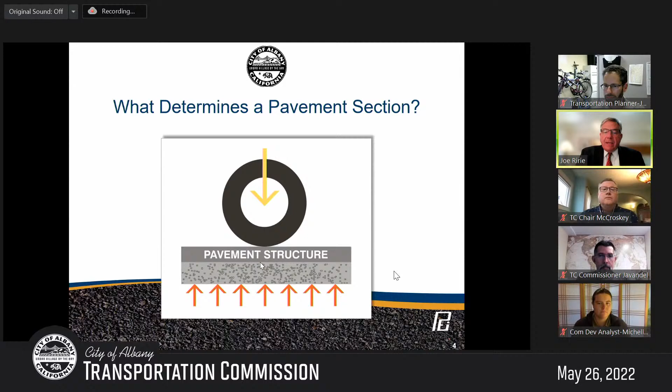A pavement structure is actually dependent on the loading from the top and what it is built on. The worse the soil is and the heavier the loads, the thicker the pavement structure needs to be. When pavement deteriorates, it deteriorates not linearly. It follows this S-shaped curve where the pavement looks good for a while and then drops off quickly and then levels out in a poorer condition.

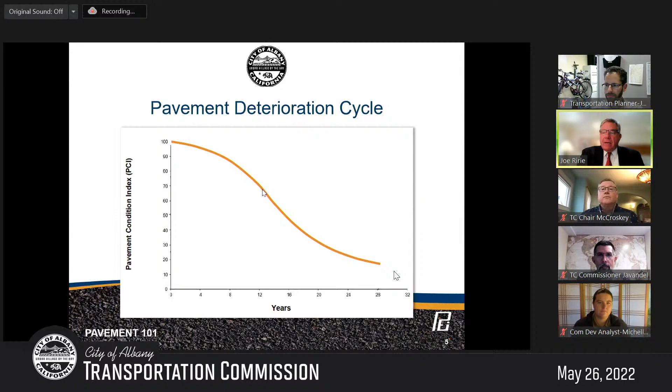We've seen that as we've driven on roads before, where we drive a road, and then one day we realize, wow, when did this road get so bad? That's because it's starting to fall down into the steeper part of the curve.

Asphalt pavement deteriorates in two different ways. The first way is through the environmental effects, the oxidizing effects of the sun and the water, and the second is from the fatigue loads from heavy vehicles.

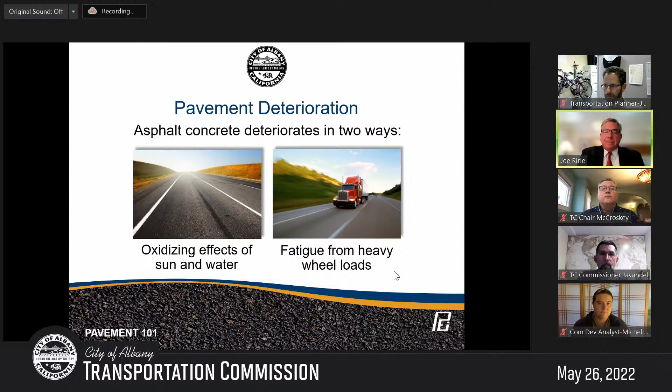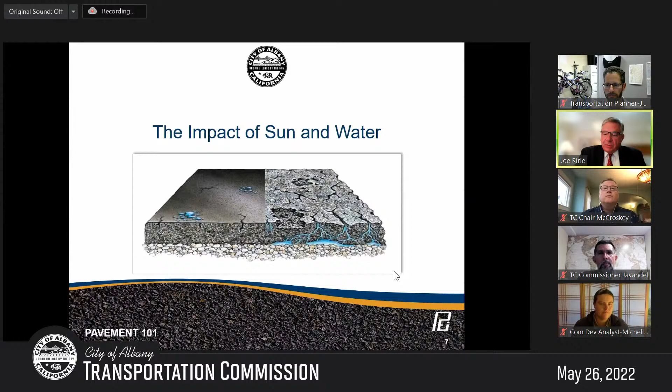In each of these different cases, the impact of the sun and the water actually breaks down the binder that is holding the aggregates together. The aggregates are glued together with the oil, and as the oil is exposed to the oxidizing effects of sun and water, it age hardens and becomes brittle. It actually will begin to burn out the volatiles and will lose mass. And as it loses mass, the pavement shrinks and cracks begin to form. And as those cracks form, then the pavement opens up and water can be introduced into the structure.

When we talk about the impact of heavy loads, it was always difficult for people to be able to wrap their head around it. And so we came up with this chart that allows us to think about pavements in a more user-friendly way, or the truckloads in a user-friendly way.

Many years ago, we got a Chevy S10 Blazer, and then we called that one vehicle unit, and then compared it to different types of trucks: 2, 3, 4, 5 axle trucks, buses and garbage trucks, and fully loaded 5 axle trucks, and equated it to our Chevy S10 Blazer.

One 2 axle truck, typical, is equal to 442 Chevy S10 Blazers. One 5 axle truck, fully loaded, delivering to Safeway or Lucky's, is going to be equal to almost 15,000 Chevy S10 Blazer units. So when it comes to pavement design and pavement structure, it's not the busyness of the road that really impacts the pavement design. It is the loading on the road.

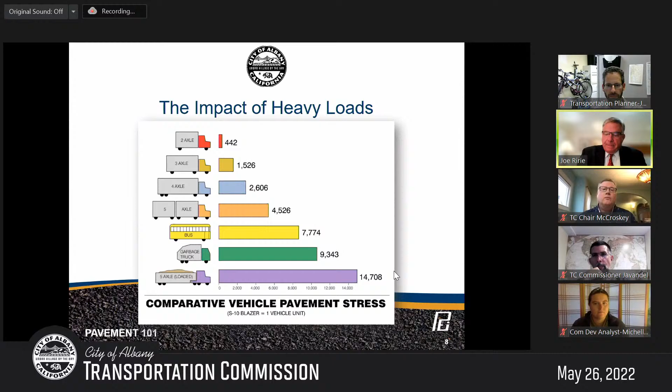As a prep for the information that we'll be sharing about the pavement management system, I wanted to remind you that the pavement management system was designed as a budgeting tool. It's an inventory tool. It's a place to be able to record pavement conditions, and it's a guide to be able to select potential street candidates for future repair and maintenance.

It was originally developed by the U.S. Army Corps of Engineers during World War II as a way to be able to rate the conditions of their runways. Since then, we've adopted it and use it as a way to be able to talk about our pavements.

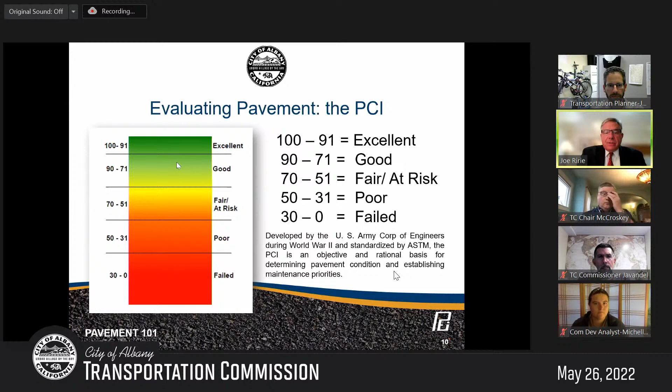It's a scale from 100 to 0, 100 being in excellent condition, no defects, 0 meaning that it has so many defects that you would consider it failed. There's a gradation that happens throughout there, similar to, you can almost think about it as a report card for your pavements.

It's dependent on the different types of distresses that are exhibited in a pavement structure. These are 4 very common types of distresses. On the left is weathering and raveling, where the fines begin to wash off or wear off from traffic.

The middle two slides are talking about that shrinkage from the environmental effects. It's opening up in this slide here where the pavement seam is - it's the weaker part of the pavement. In this slide over here, you're seeing what we refer to as block shrinkage cracking. The slide all the way to the right is alligator cracking, which is a fatigue type of crack.

I want to point out to you that the first three pictures are all distresses caused from environmental effects. The alligator cracking is from the loading, or the heavy loading, which means that you can build a brand new pavement and it's still going to deteriorate even though it never ever sees a vehicle.

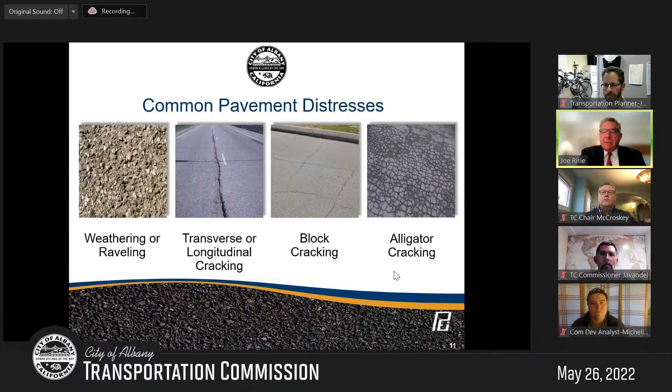So as part of the pavement condition update, we went out and assessed the pavements of Albany, and we looked at a number of different types of distresses. We measured them, quantified them, and then put them together into PCI.

So when you go out and look at pavements, at least for me, the pavement starts talking to me and telling me a story about itself, what's happening and what's going on. That helps with the design process.

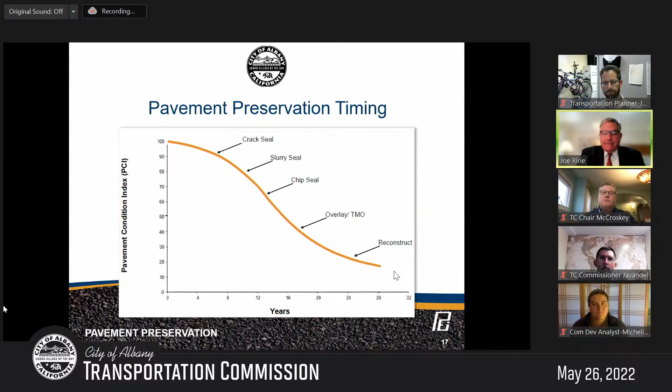As long as I've been doing this, I've only come up with three different types of pavement management strategies. Let me talk about each one of these.

The first one is a focus, or what we refer to as a best-first or top-down type of management, thinking: if I've got limited dollars, where do I want to spend my money? The first strategy is just focusing all your money on the very best pavements and ignoring the rest of them.

Another type of strategy is taking all the money you have available and focusing it on the worst pavements, selecting your pavements based on the worst PCI.

Both of those strategies, while they can be effective in a short-term situation, will not yield long-term sustainable pavement management. In fact, if you always focus on your very best pavements, then based on how deterioration occurs, you end up with a lot of pavements in good condition and a whole bunch of pavements in poor condition, without any in the middle.

If you're dealing with a worst-first type of situation, then you're just anticipating that every pavement is going to be in a failed condition, and that's the most expensive time to address those pavements.

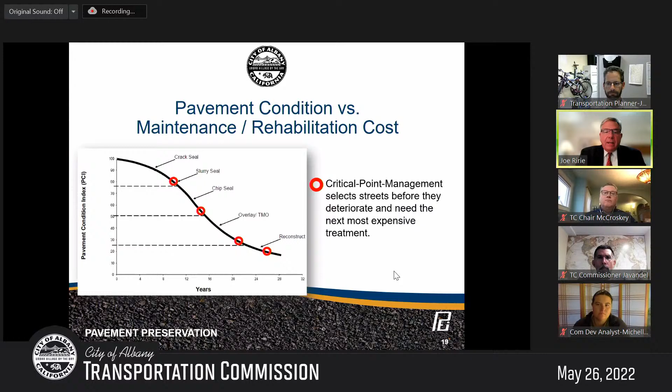You try and catch those pavements before they fall down into the next category, needing the next treatment. And so you'll see that we're doing that at several points along the deterioration curve. So a good pavement management system actually is pulling from all different parts of the curve at the optimal time for the deterioration of the pavement. And by doing that, you get the longest sustained impact to your pavement.

Okay, so let's talk about our assessment findings. For the city of Albany, just to remind you, you have just a little bit over 30 centerline miles. A centerline mile is if you take the very center of the street and you measure that distance. It's regardless of whether it has 2 lanes, 4 lanes, 6 lanes. The number of lanes is not counted here. It's just the centerline miles. So 30 centerline miles, and you have a total of a little over 5 million square feet of pavement.

Your system-wide average weighted PCI right now is a 60. Now that 60 also includes some upcoming treatments that have been scheduled for the 2022 year, and my understanding are right around the corner from construction. But what I want to emphasize is that your 30 centerline miles, or over 5 million square feet of pavement, has a replacement value of over $134 million. That means that you have a $134 million asset that you're trying to take care of.

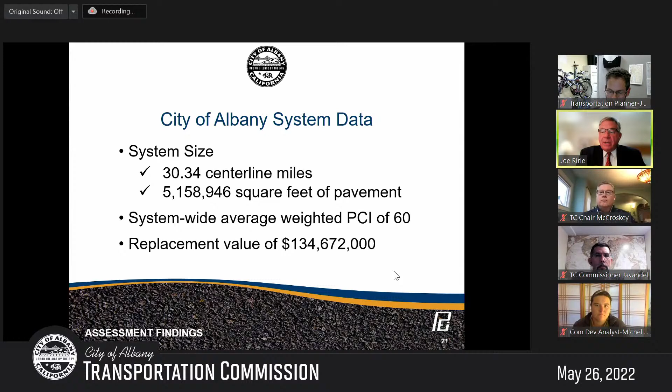That asset is just the pavement only. It does not include curb and gutter. It does not include curb ramps. It does not include sidewalks. It's just the pavement section only. Okay.

We divided up the system, looking at it from a functional class point of view. A functional class for a roadway is how it is being used. And so your arterials are the most used streets, often the busiest. Your collectors are the next busiest. And then you have residential streets, which are the neighborhood streets that the houses are usually on. And then you have some alleys as well that we classify as others.

So our system right now, and this is your 2022, includes the streets that are just done. So you're going to have a 60 PCI. Your arterials are a 55, your collectors are a 60, your residentials are a 62, and your alleys are actually a 62. And I thought it would be interesting to compare this over the last couple of years so you can see a trend.

Your arterials, you're not focusing as much on your arterials, they're dropping. Your collectors are staying pretty much the same. Your residentials is where I can tell from this data that you're focusing your dollars. And as a city, you were dropping in 2021, but with the scheduled work that's upcoming, you're looking at maintaining your system here.

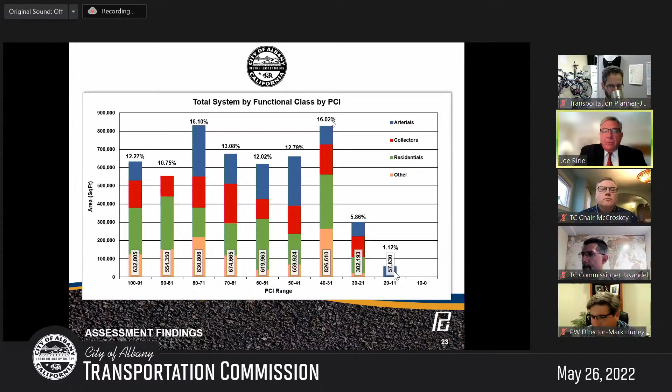Let's talk about funding needs. Your system, in order to maintain your 60 PCI, needs an investment of $2.6 million per year annually in order to hold it there. Your current budget is only $1.9 million per year. So that's why you're seeing after 5 years the trend line starting to separate, because you're not spending enough money.

If you wanted to increase your PCI by 5 points, you would need to spend $3.9 million per year annually. And if you spend nothing, then you can expect your PCI to drop to a 47 in 5 years. What your system wants to do from an optimal point of view is it wants to operate at an 83, but it would take a $35 million expenditure in that first year to get you to that condition.

But then in order to maintain it over years 2 through 5, it only takes $700,000 to $800,000 per year. So if you could get that high, then your maintenance costs actually go down.

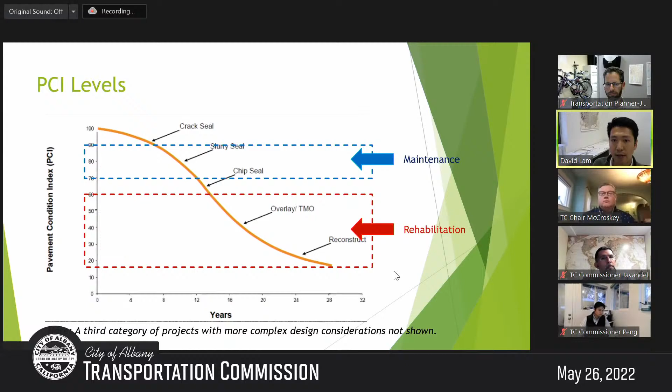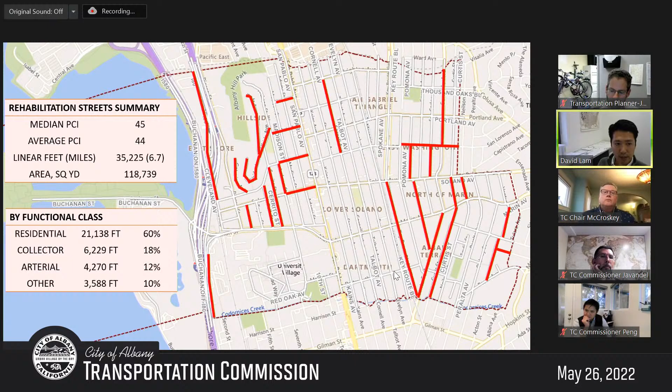Next up is the streets that are candidates for rehabilitation. So of course, these streets are going to be lower in PCI. So we're looking at a median PCI of 45 for this collection and an average PCI of 44. And that's a total of 6.7 centerline miles. And this is a coverage of 118,739 square yards. And then looking at the breakdown by functional class, about 3/5 are pulling from residential streets. And then collectors, arterials, and other streets make up the other 40%.

I also talked about avoiding conflicts with potential utility work. Some identified locations where we have potential sewer projects coming up include a cluster up near Brighton Street, a cluster between Solano and Washington, and then bounded east and west by San Pablo and Masonic.

And then some potential sewer work down by Dartmouth. I also wanted to point out that there's an absence of streets down in the south side of the city, south of Marin, where East Bay Mud recently completed their Cornell cluster water line replacement. So we're waiting to see, after East Bay Mud comes through with their pavement restoration, what the pavement condition looks like, and we may add those streets to the list to complete those streets.

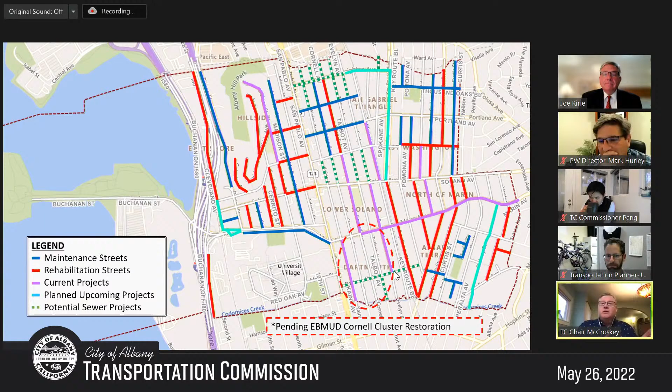We as a city, and I assume most cities, tend to consider their waste management contracts separately from their pavement management plans. At what point do you get to a point where it makes more sense to spend more money to use smaller garbage trucks versus putting more money into pavement? And are we anywhere near close to that?

Was that to me, Chair McCroskey? Anybody who's willing to take it.

I'm not seeing garbage trucks get smaller unless they're in communities with tight, small streets. Otherwise, they are just loading up the garbage trucks with as much as they can. And I will point out that garbage trucks are not monitored like our bigger trucks on the freeways. So I would imagine by the end of the day, they are all overweight, or at least at or overweight, which is consuming more pavement life. So it's a serious problem, but I'm not seeing any designs of trucks trying to minimize the loading impacts.

You might have hit on something right now. If you wanted to work on the design of a truck and try to figure out how to spread the load, you could probably make a whole bunch of money right now. Not my expertise. My expertise is asking annoying questions.

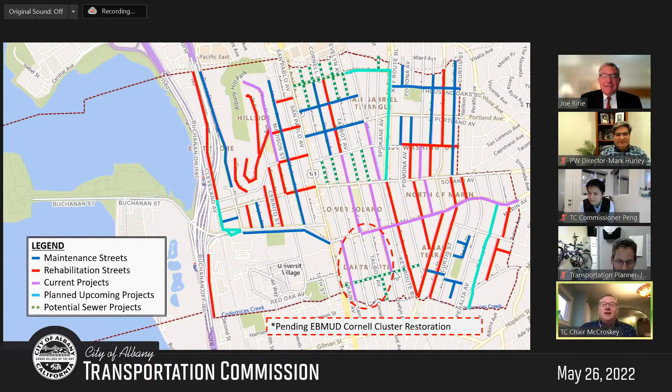Hey, Chair McCroskey, you're great, keep up the good work. Oh, and I'm so glad you're here. So we got Climate Action Committee here at the same time. This is cool, I'm glad about that. So here's my comments and questions.

All this oil on the pavement is bad. It runs off into our water and goes into our creeks and damages the fish and wildlife. So how about using cellular concrete? I was just Googling this whole time, I had a lot of time to Google. All the bridges and industrial highways are made out of concrete, and that makes the most durable pavement. It lasts for 50 years. So I don't know, what kind of pavement have we been using?

Down on Cornell a few years ago, we repaved it, and East Bay Mud came in between Marin and Solano on Cornell and just tore up the whole street right after we paved it, to put in a water pipe. I'm getting ready to call East Bay Mud at this point for damaging our streets. I can't wait to go to one of their public meetings.

So, oh yeah, water runoff, climate action. I was about to send an email about that, but I'm glad you're here. So what sub-base do we use for the bottom part for rehabilitation? Because cellular concrete could be a really good sub-base if we have to do some rehabilitation work.

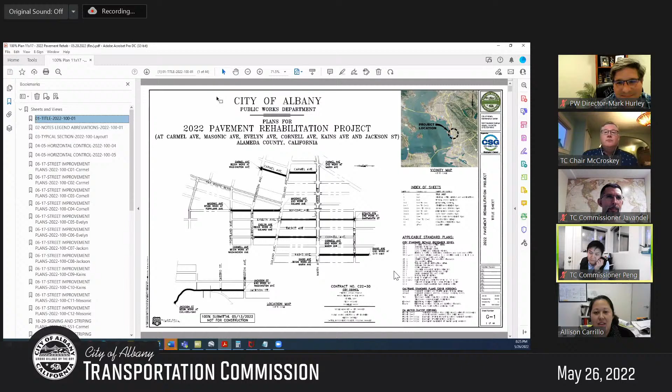Can everyone see my screen here? Yes, okay great. As I mentioned, we're... Ms. Carrillo, could you switch to the slideshow mode? Some of us have fairly small screens. Oh, this is a PDF. So there is a slideshow mode in PDF. There is, wonderful. Give me a second while I figure it out. Just press Control L. Control L. That was very helpful, I never knew about this. Great, it may take me a little longer to navigate if I don't have bookmarks, but if you bear with me, we'll get through this.

So starting off, these are the locations of work. I think Fareed mentioned Masonic and the bike lane. We are specifically targeting two blocks of Masonic intersections next to the Greenway, which is an existing bikeway. In addition, we have Carmel Avenue, both north and south of Solano Avenue, and Evelyn Avenue south of Solano. We have Cornell Avenue, including the recent East Bay Mud pavement area, which we are actively coordinating with East Bay Mud on to determine next steps, balancing getting residents a usable street as soon as possible against mobilizing twice in quick succession. So this is an ongoing item we're dealing with. Kains Avenue, which is a bikeway in the ATP, we would like comment on the bikeway treatment, and Jackson Street down in the lower left-hand side.

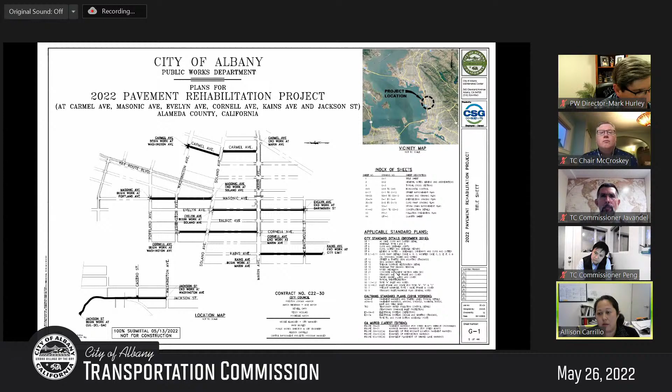So diving in a little more detail, I don't want to make this presentation too long, but I wanted to take this opportunity with Joe's recent presentation to dive into what our decision process was here. What you'll notice is that on some streets we have thicker sections of rehabilitation towards the center line of the roadway. After site investigations, we identified the same issues Joe mentioned: alligator cracking running primarily in the travel lanes. Streets within Albany are generally fairly narrow, so we have some natural traffic calming because cars have to pull off to the side before passing another vehicle. That means we don't always see the rutting exactly in a consistent wheel path—sometimes it's not exactly in the parking lane, not exactly at the crown or approaching the crown. So we have thicker sections on certain streets where we're seeing more of that, with a slightly thinner section towards the parking lane where we're not getting the same kind of loading.

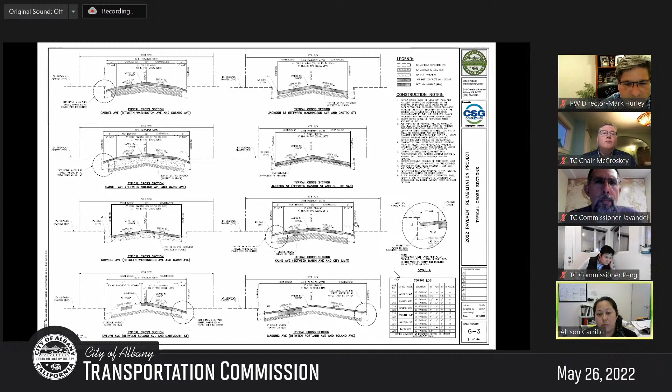These do increase the costs of our projects, and we try to account for them in the PTAP, but because they are site specific, it's a little hard to quantify in a very detailed manner. So occasionally on streets we find that we're doing quite a bit more work in intersections, but the resulting ADA ramp is compliant and far more pleasant for everybody to navigate.

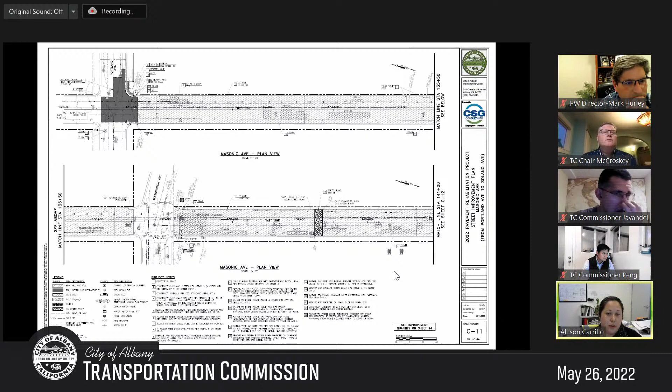On Portland Avenue, we identified—again this is a fairly new ramp, unfortunately—but due to cross slopes, we needed to make some adjustments here. But this is the only one at this intersection that was identified for improvement.

One of the constraints in this area was the storm drainage, so it really was a project more appropriate for a paving project like this than a standalone project. Now that we have the opportunity, we've added it to the limits and we're taking care of it here.

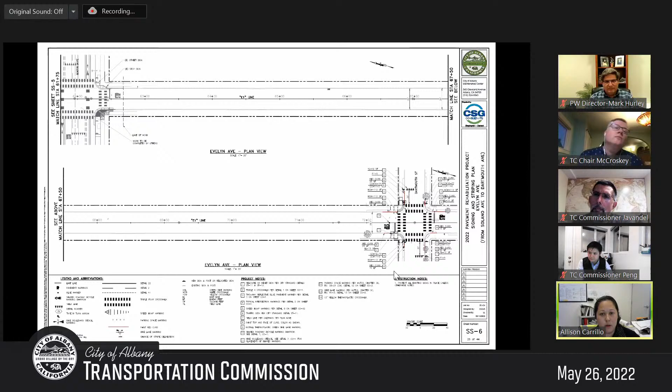We want to make sure people understand that on this side of the street, this is a retaining wall and there's no accessible pathway here. So we were trying to guide people not to cross the street here, even if there's no ramp.

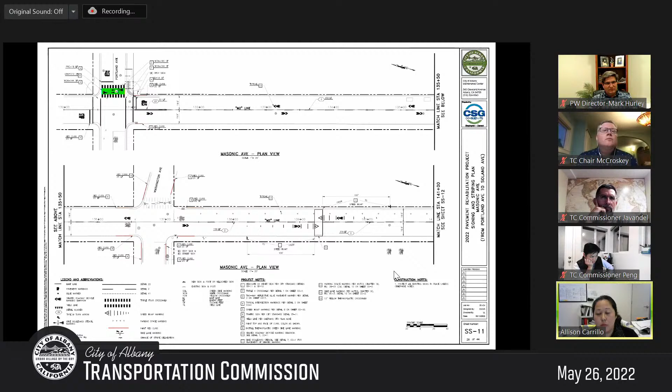Finally, our project also includes some of the designs shown in the Masonic intersections improvement. This is due to coordination—we have a lot of projects occurring in the Solano Masonic and Marin Masonic intersections in short succession.

To make sure we have costs for this work, we are proposing to have the striping in a couple of different projects, meaning the Masonic intersections project is likely going to come in first. However, with supply chain shortages, there's no guarantee of that. So we're showing these improvements in a variety of projects, and we will remove them if necessary when it comes time for construction based on the actual timing of work. These are all items which are unit cost items and easily quantifiable.

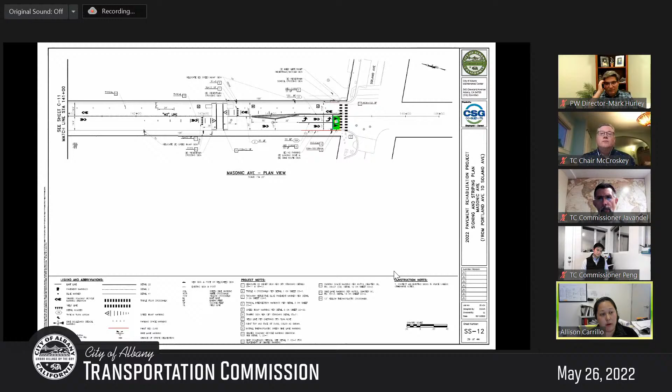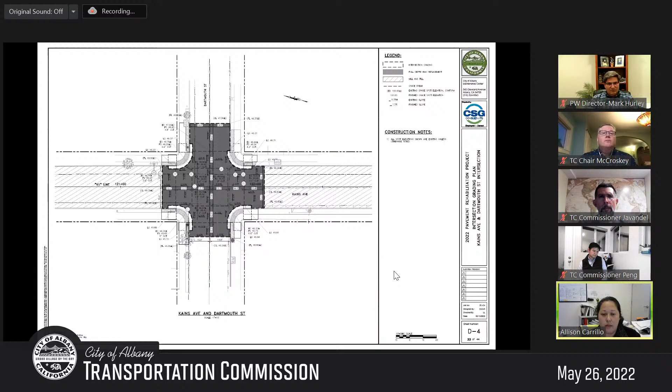We've also made it a point to ensure as much connectivity within the crosswalk, so that pedestrians crossing are not seeking the ramp on the other side. They're directional and in the direction of travel with the detectable warning surface, so that it's more navigable for people who are in wheelchairs.

In this intersection, what you'll see is that we have storm drain improvements coming in on this side to relocate an existing storm drain, which was in conflict with the existing ability to bring in a curb ramp. Additionally, we have included retaining walls. We're working with the property owner to have that constructed underneath an existing stacked stone or stacked cinder block to keep that retaining curb out of the pedestrian path of travel. And that was a desire from previous discussions to keep raised curbs out of the path of travel as much as possible.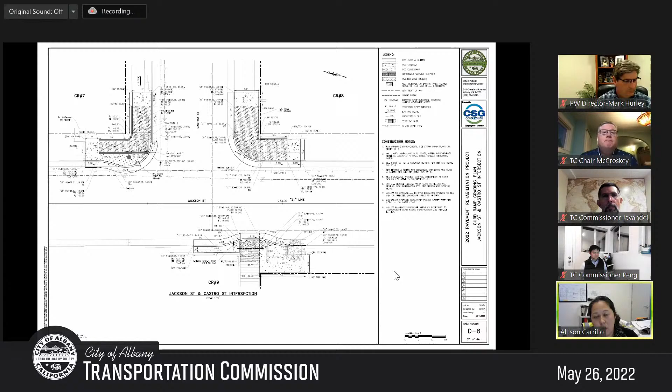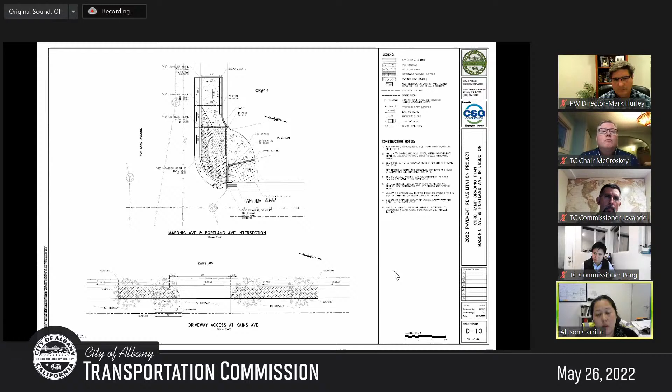Again, with the modified Cs. And then here, this is Masonic at Portland Avenue. We are making some minor changes to this one. We are extending out the detectable warning towards the south to provide a crossing that is as wide as possible. Currently, it's kind of squeezed. And extending the width of the detectable warning band in the ramp to match with the incoming pathway, similarly to what we did on Masonic intersections.

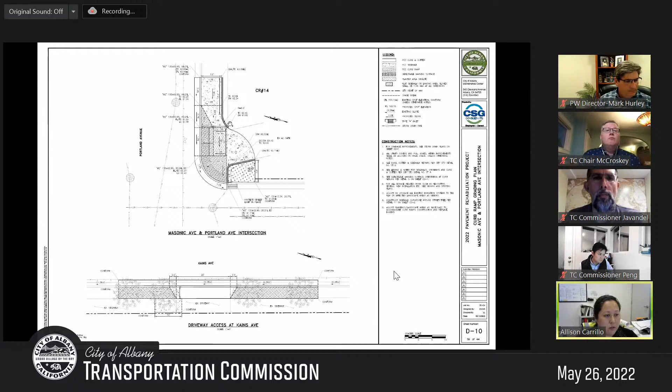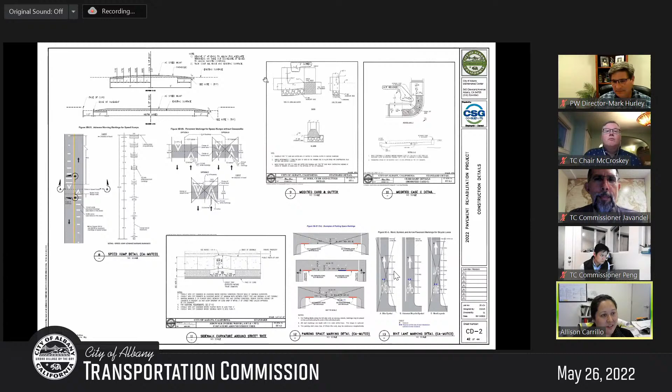And with that, that's the fairly long presentation, and I hope to hear some comments and answer questions. Thank you. Commissioner, questions? Commissioner Javandel.

It looked like at the intersection of Carmel and Marin, the corners are getting straightened out or squared off more there, which is great. I'm just curious if that was part of, in addition to better traffic calming, trying to address the drainage issues at that corner.

Yeah, it's interesting. I'm glad you caught that. So that one, we have the same designer working on both the Marin Avenue project and this one. And that improvement there is part of the ATP proposed reduction of curb radii for pedestrians. It has led to some storm drain improvements that are needed on this project, and we're working through that. Thank you.

Other commissioner questions? Right. I don't have any either. Let's take it to public comment. Okay, Jeremiah. All right.

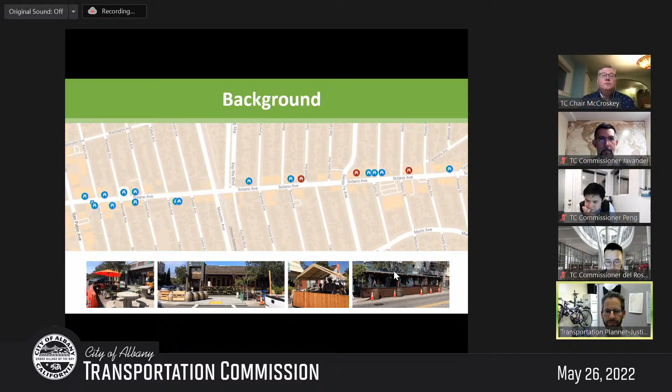Thank you, Chair McCroskey. So this is revisiting an item from last month, proposed guidelines for long-term parklets. Brief refresher, the temporary outdoor dining program began almost 2 years ago now. And we currently have 15 installations along Solano Avenue between San Pablo and Ordway. We began discussing a revised program in the fall, given the duration of COVID impacts and interest in continuing in-street installations. We presented survey results in January and last month at the commission meeting for an initial draft program guidelines document.

The draft guidelines separated out the requirements by section. I'll go through briefly the changes that were made since last month's presentation. New sections include brief sections on insurance, signage, and acceptable use, and I'll go through the changes to the other sections one by one.

For the parklet location and setbacks, we're proposing a limit to 2 vehicle parking spaces per applicant when reaching a 40% threshold. This is in response to feedback concerning impacts on adjacent businesses. Some of the feedback wanted a hard cap, such as no more than 50% of the block. Others weighed in that concentrating installations made a block a destination. So this was an effort to scale down to 2 as we reach that maximum threshold to balance those 2 factors of wanting to allow concentration where it was desired and useful as a destination, but recognizing the concerns around concentrated impact for other businesses.

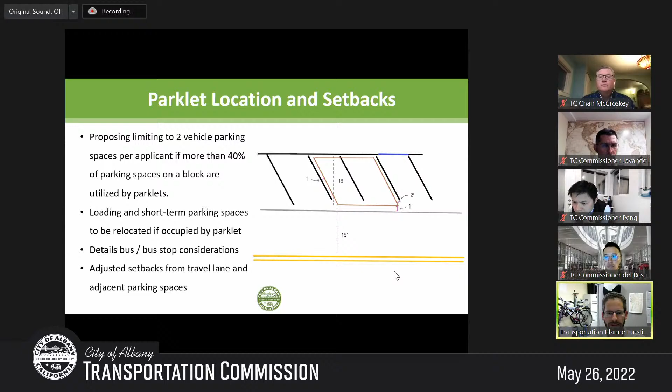For the perimeter barriers, in response to some of the questions and clarifications requested during discussion, there's some more detail included on the wall, railing, and barrier requirements and the intention of these elements. We've removed the wheel stop requirement for angled parking spaces and included a requirement for a flexible bollard or delineator post at the 2 corners adjacent to the travel lane. We still didn't really go into detail on heavy or substantial barrier. There was some discussion around that. We could still do that in the guidelines or in permit application.

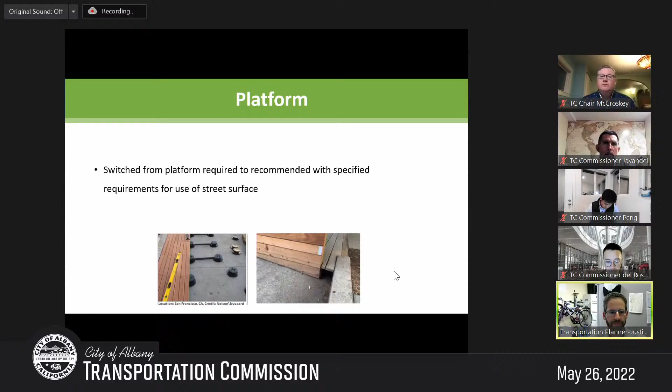On the platform, we did remove the platform as a requirement and switched to recommending that, and we specified the requirements for use as a street surface and adjusted the drainage requirements to accommodate more of a ramp-shaped drainage area along the curb. For ADA, we made some minor changes there. I missed redlining a call out of a new reference to potential review by a certified access specialist, so calling that out since I failed to do that in the redline document. And referencing standard restaurant accessibility requirements.

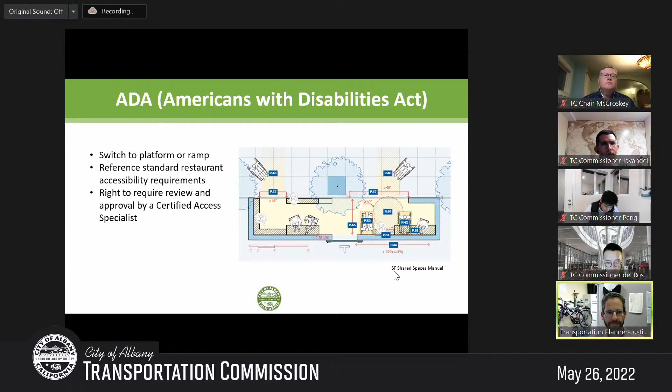In the fire section, we added some details on electrical lighting. On maintenance, we added that movable furniture should be secured when not in use. We combined the fees and public access sections and changed from a 2 fee type structure in the earlier draft to 1 fee, with a proportional reduction in that annual fee for providing space for general public use. So that could be through providing public access seating or a bench, or through adding bus stop parklet kind of features where the portion of the installation is for that public use.

At this point, this is still distinguishable from the bus stop parklets, those being more of a permanent change to the curb line with permanent construction materials possible, whereas this is still removable infrastructure and is a little bit different than the first couple of bus stop parklets. So the new sections we added specify the insurance requirement, limit signage, and then reference some other regulations regarding acceptable use, including noise, sale of alcohol, health, smoking, and public nuisance.